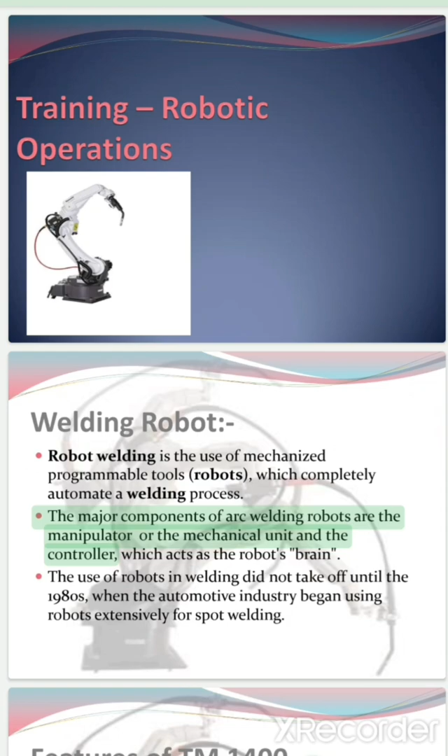Robot welding is the use of mechanized, programmable tools—robots—which completely automate a welding process. The major components of arc welding robots are the manipulator, or mechanical unit, and the controller, which acts as the robot's brain.

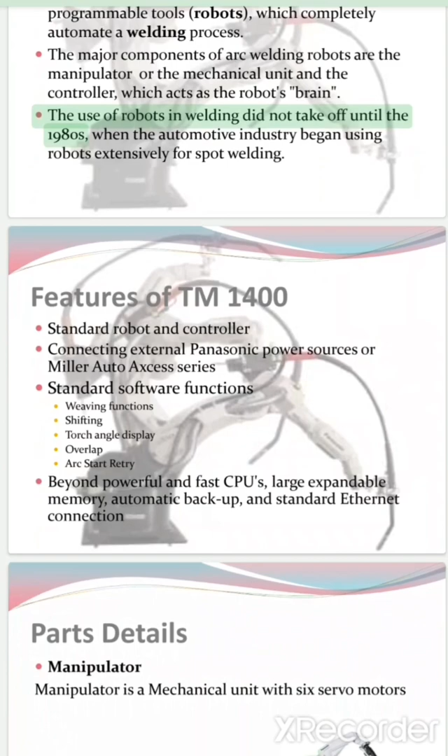The use of robots in welding did not take off until the 1980s, when the automotive industry began using robots extensively for spot welding.

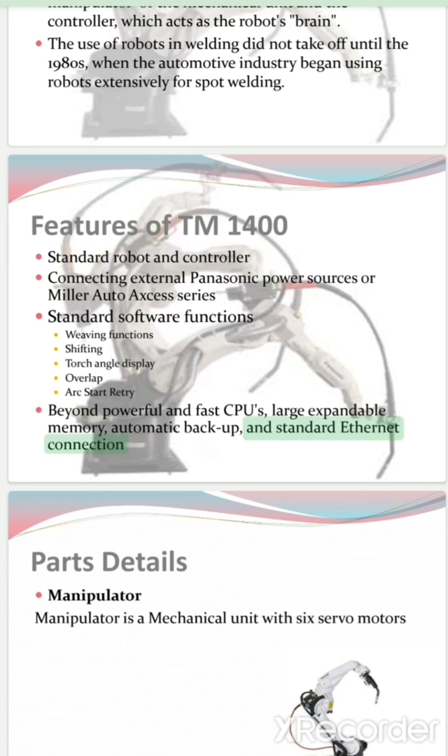Features of the TM1400 standard robot and controller: connecting external Panasonic power sources or Miller Auto Axcess series, standard software functions, weaving functions, shifting torch angle display, overlap arc start, powerful and fast CPUs, large expandable memory, automatic backup, and standard Ethernet connection.

Parts details. The manipulator is a mechanical unit with 6 servo motor robot axes. A manipulator has 6 axes, and we can add more additional axes at the fixture end—these are called external axes.

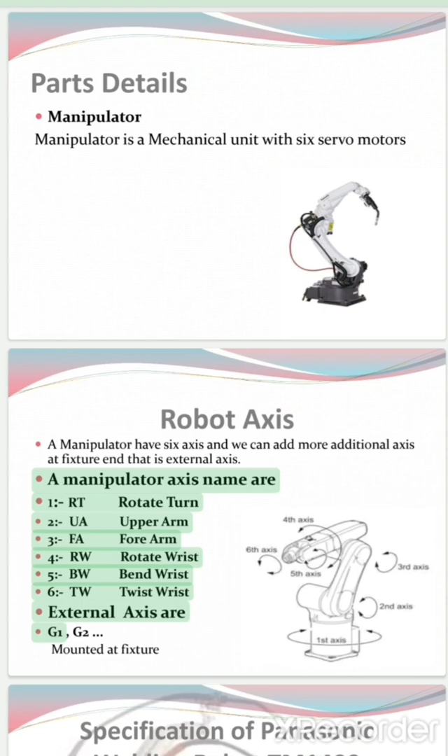Manipulator axis names: 1, RT rotate turn; 2, UA upper arm; 3, forearm; 4, RW rotate wrist; 5, BW bend wrist; 6, TW twist wrist. External axes are G1 and G2.

Mounted at fixture. Specification of Panasonic welding robot TM1400: payload 6 kg max.

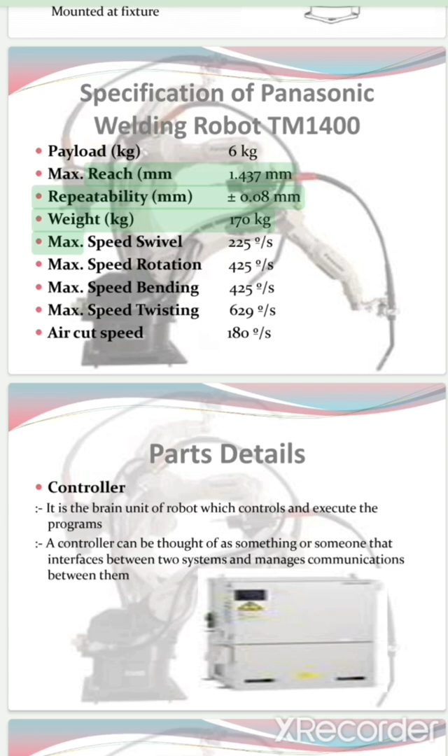Reach 1437 mm. Repeatability plus minus 0.08 mm. Weight 170 kg max. Speed swivel 225 degrees per second max. Speed rotation 425 degrees per second max. Speed bending 425 degrees per second max. Speed twisting 629 degrees per second. Air cut speed 180 degrees per second.

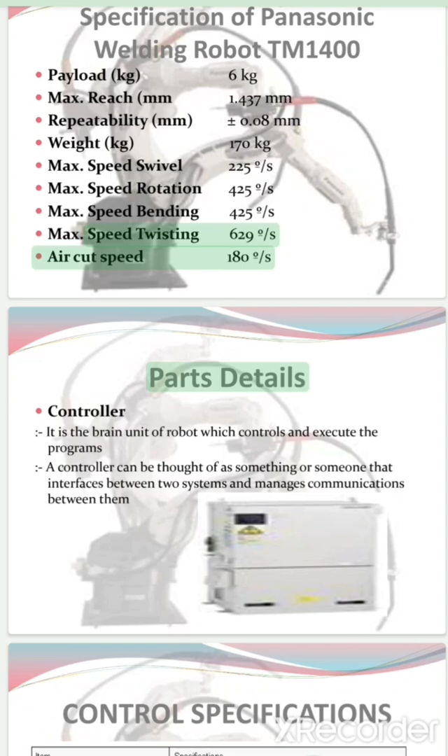Parts details. The controller is the brain unit of the robot, which controls and executes the programs. A controller can be thought of as something or someone that interfaces between two systems and manages communications between them.

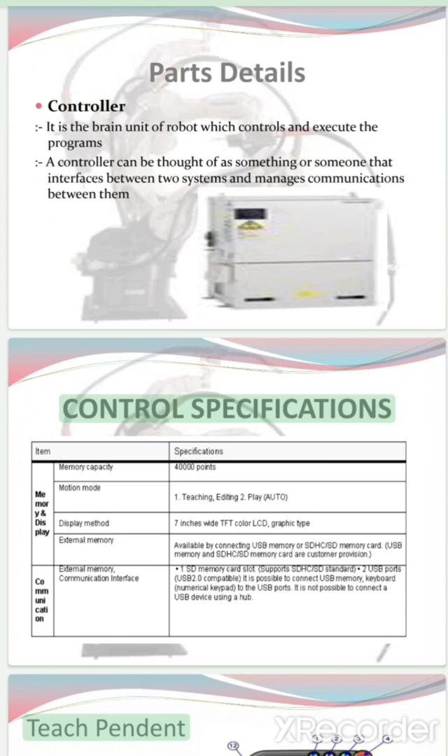Control specifications, teach pendant. 1. Start switch: this switch is used to start or restart robot operation in auto mode.

2. Hold switch: this switch is used to suspend robot operation while keeping the servo power on. 3. Servo on switch: this switch is used to energize the servo power.

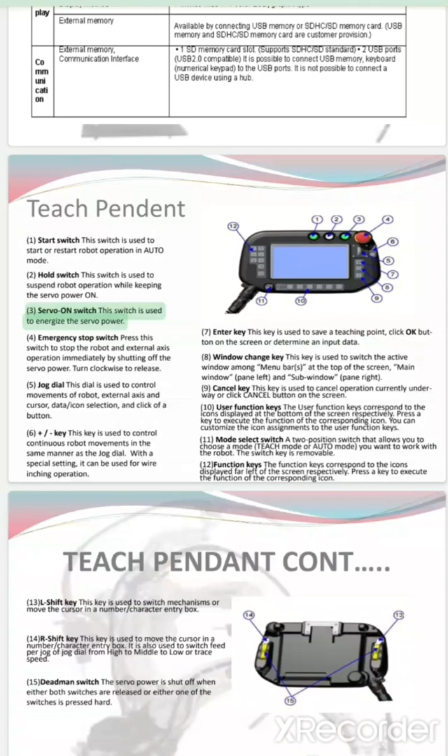4. Emergency stop switch: press this switch to stop the robot and external axis operation immediately by shutting off the servo power. Turn clockwise to release.

5. Jog dial: this dial is used to control movements of the robot, external axis and cursor, data/icon selection, and click of a button. 6. +/- key.

This key is used to control continuous robot movements in the same manner as the jog dial, with a special setting. It can be used for wire inching operation.

7. Enter key: this key is used to save a teaching point, click the OK button on the screen, or determine an input data.

8. Window change key: this key is used to switch the active window among the menu bar at the top of the screen, the main window pane on the left, and the sub window pane on the right.

9. Cancel key: this key is used to cancel the operation currently underway, or click the cancel button on the screen.

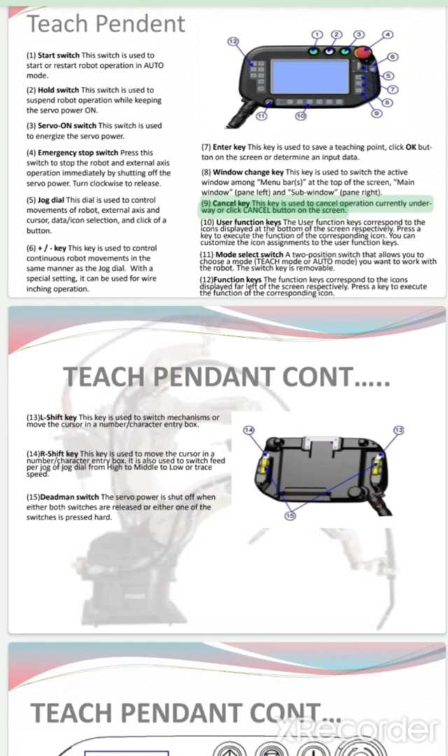10. User function keys: the user function keys correspond to the icons displayed at the bottom of the screen respectively. Press a key to execute the function of the corresponding icon. You can customize the icon assignments to the user function keys.

11. Mode select switch: a two-position switch that allows you to choose the mode you want to work with the robot—teach mode or auto mode. The switch key is removable.

12. Function keys: the function keys correspond to the icons displayed on the far left of the screen respectively. Press a key to execute the function of the corresponding icon.

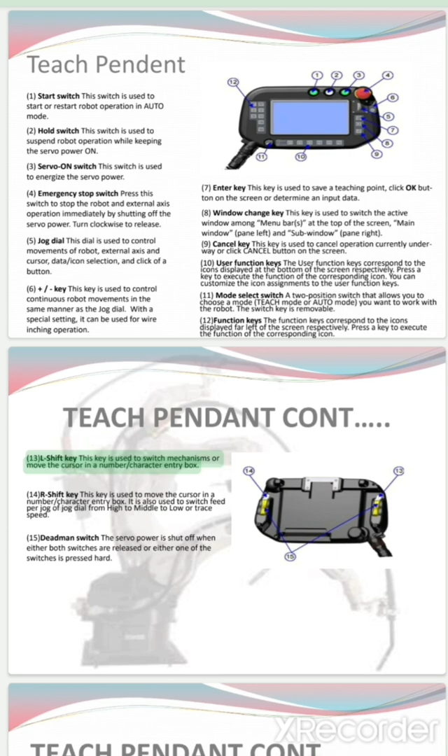Teach pendant, continued. 13. L shift key: this key is used to switch mechanisms or move the cursor in a number/character entry box.

14. R shift key: this key is used to move the cursor in a number/character entry box. It is also used to switch feed per jog of the jog dial from high to middle to low, or trace speed.

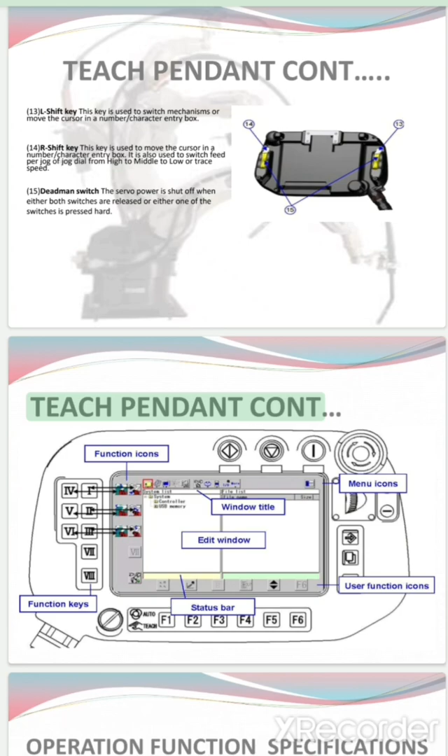15. Deadman switch: the servo power is shut off when either both switches are released or either one of the switches is pressed hard. Teach pendant, continued. Operation function specifications.

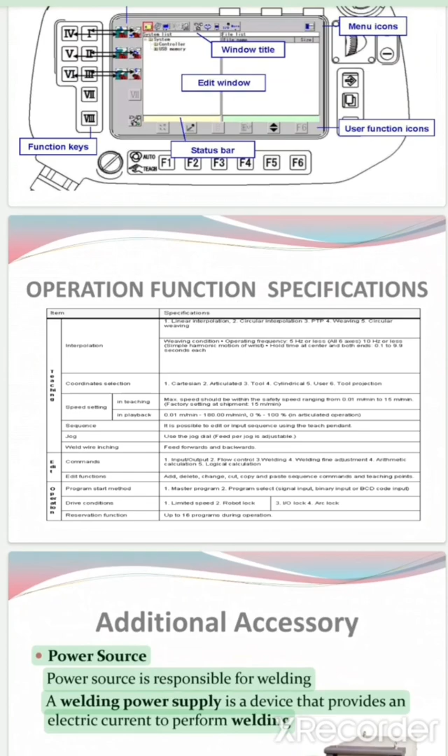Additional accessory: power source. The power source is responsible for welding. A welding power supply is a device that provides an electric current to perform welding.

Welding is a fabrication process to make a high-strength joint between two or more parts by heating to their melting temperature, with or without the application of pressure, and with or without the use of filler metal. The filler metal has a melting point approximately the same as the base metal.

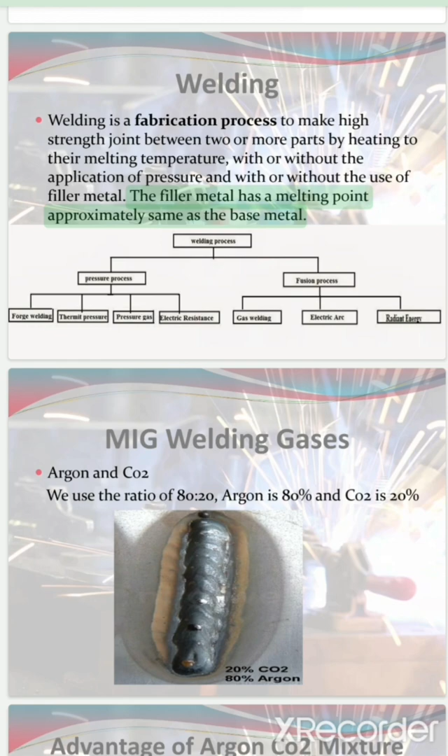MIG welding gases: argon and CO2, used in a ratio of 80-20—argon 80% and CO2 20%. Advantage of the argon-CO2 mixture over 100% CO2.

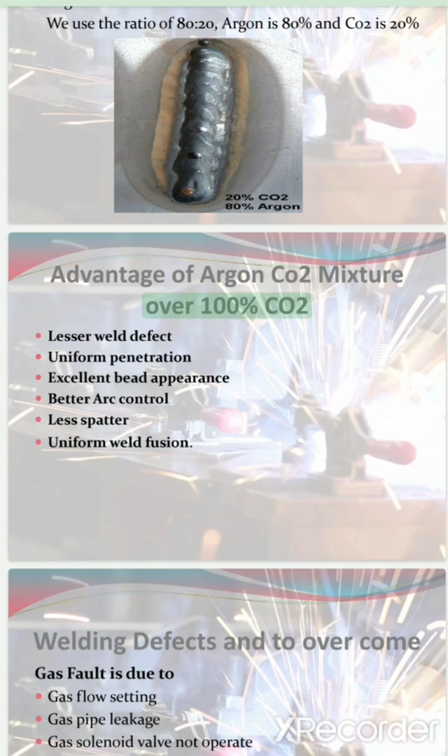Lesser weld defect, uniform penetration, excellent bead appearance, better arc control, less spatter, uniform weld fusion.

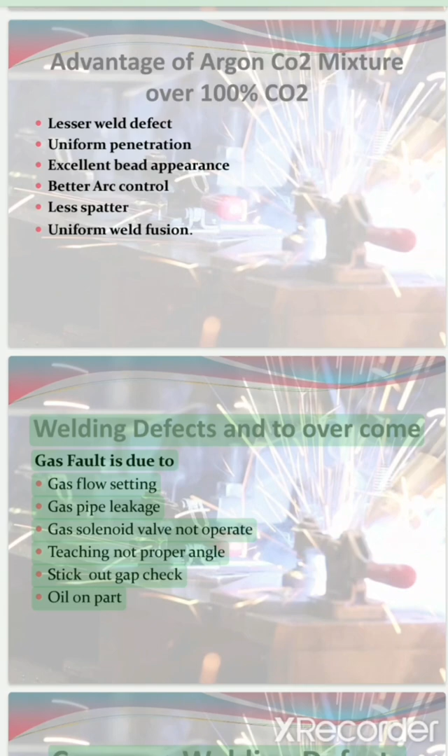Welding defects and how to overcome gas faults: due to gas flow setting, gas pipe leakage, gas solenoid valve not operating, teaching not at proper angle, stick-out gap, check oil on part.

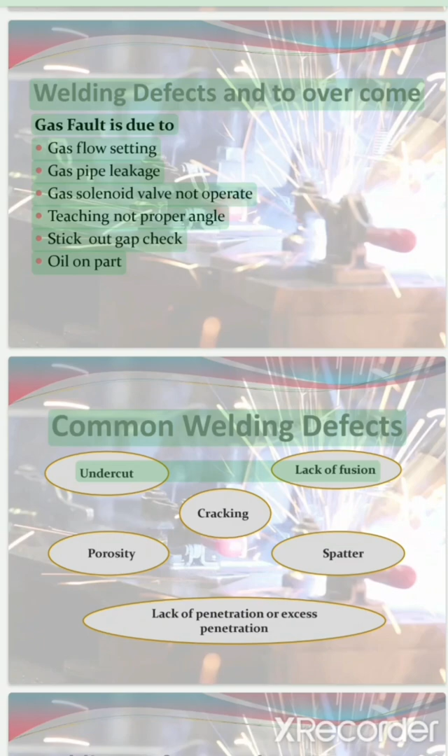Common welding defects: undercut, lack of fusion, porosity, spatter, lack of penetration or excess penetration, cracking.

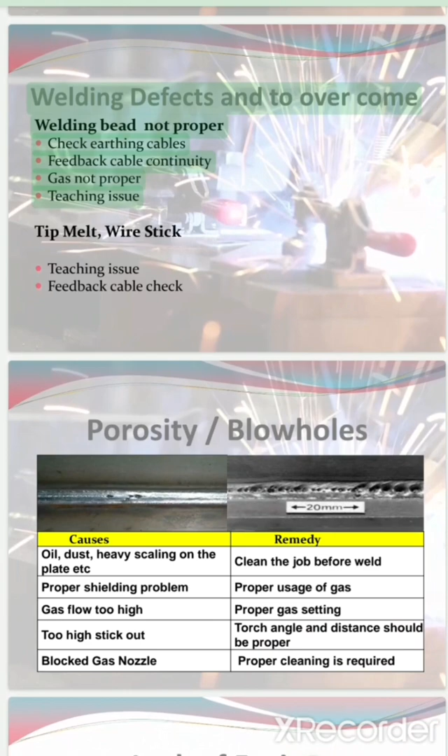Welding defects and how to overcome them: welding bead not proper, check earthing cables, feedback cable continuity, gas not proper, teaching issue, tip melt, wire stick, teaching issue, feedback cable check, porosity, blowholes.

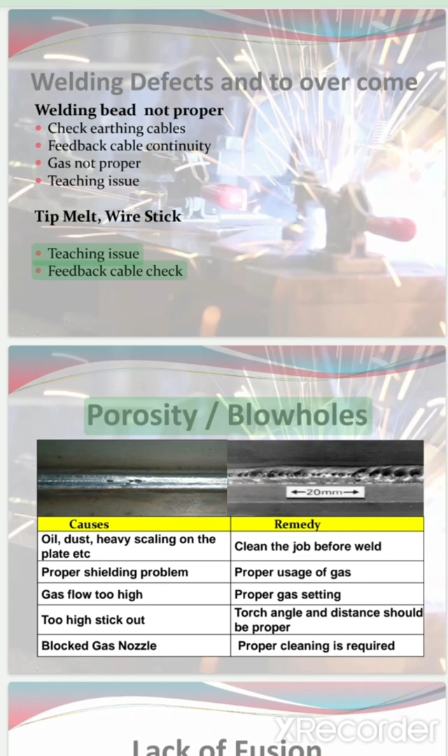Causes and remedy: oil, dust, heavy scaling on the plate etc. Clean the job properly before welding.

Shielding problem: proper usage of gas, gas flow too high, proper gas setting, stick-out torch angle and distance should be proper. Blocked gas nozzle requires proper cleaning. Lack of fusion.

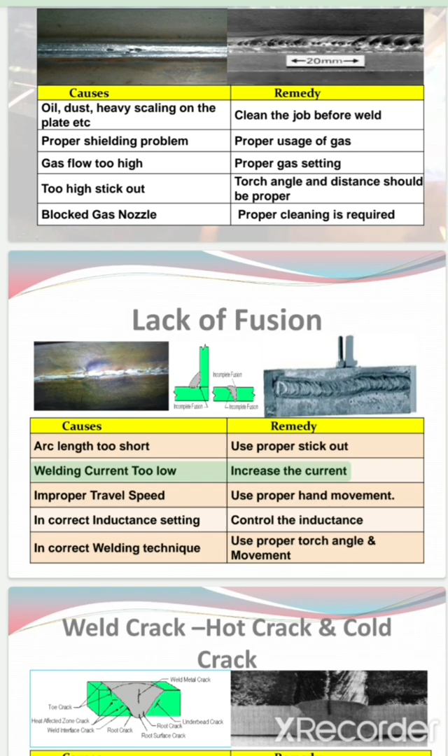Causes and remedy: arc length too short, use proper stick-out. Welding current too low, increase the current. Improper travel speed, use proper hand movement. Incorrect inductance setting, control the inductance. Incorrect welding technique, use proper torch angle and movement.

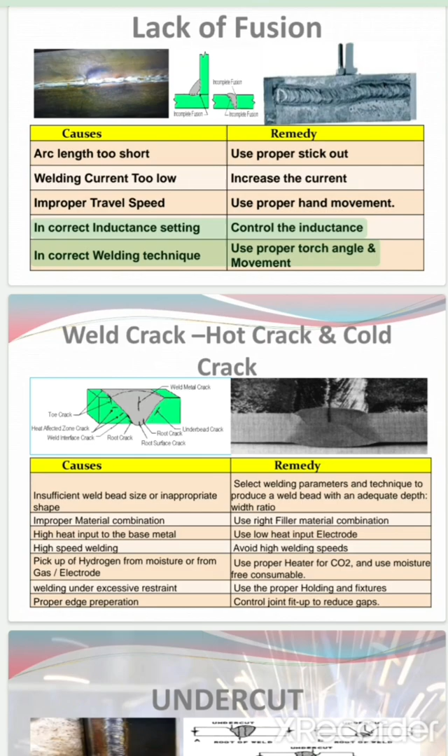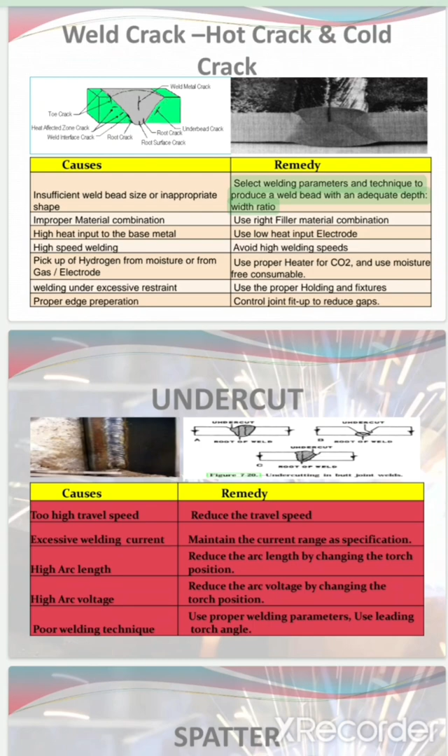Weld crack: hot crack and cold crack. Causes and remedy: insufficient weld bead size or inappropriate shape. Select welding parameters and technique to produce a weld bead with an adequate depth to width ratio.

Improper material combination: use the right filler material combination. High heat input to the base metal: use low heat input. Electrode high speed welding: avoid high welding speeds.

Pickup of hydrogen from moisture or from gas and electrode: use proper heater for CO2 and use moisture-free consumable. Welding under excessive restraint: use proper holding and fixtures. Proper edge preparation: control joint fit-up to reduce gaps.

Undercut. Causes and remedy: too high travel speed, reduce the travel speed. Excessive welding current, maintain the current range as per specification.

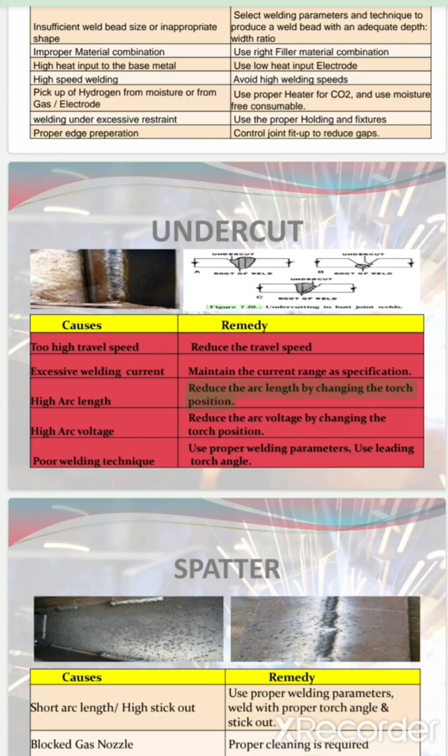High arc length: reduce the arc length by changing the torch position. High arc voltage: reduce the arc voltage by changing the torch position. Poor welding technique: use proper welding parameters and leading torch angle.

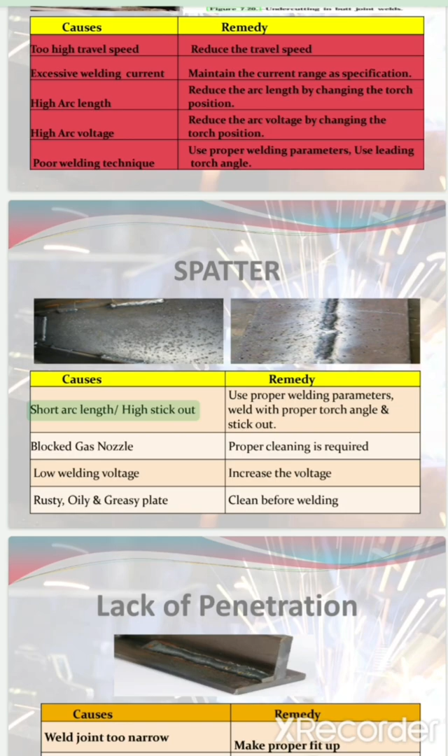Causes and remedy: short arc length or high stick-out - use proper welding parameters, weld with proper torch angle and stick-out. Blocked gas nozzle - proper cleaning required. Low welding voltage - increase the voltage. Rusty, oily and greasy plate - clean before welding.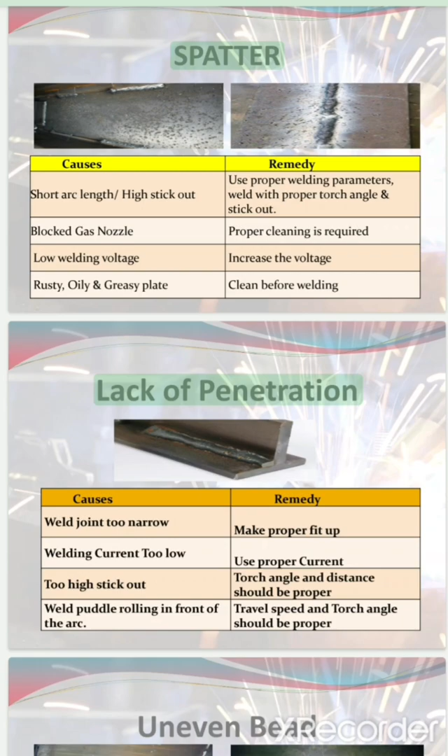Spatter and lack of penetration. Causes and remedy: weld joint too narrow - make proper fit-up. Welding current too low - use proper current, stick-out torch angle and distance should be proper.

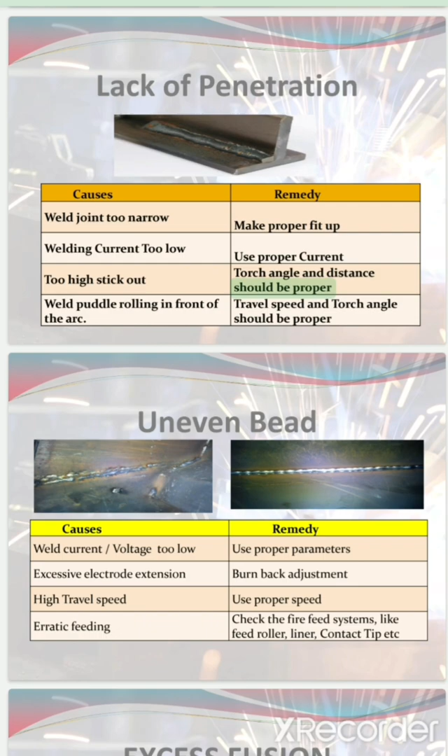Weld puddle rolling in front of the arc. Travel speed and torch angle should be proper.

Uneven bead. Causes and remedy: weld current or voltage too low - use proper parameters. Excessive electrode extension - burn back adjustment. High travel speed - use proper speed. Erratic feeding - check the wire feed systems like feed roller, liner, contact tip etc.

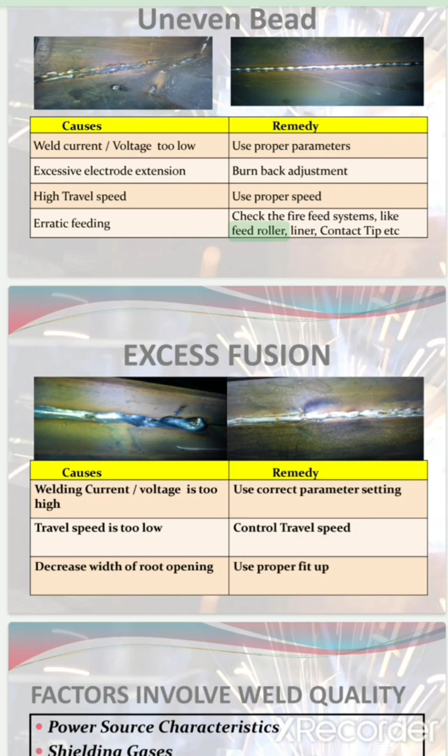Excess fusion. Causes and remedy: welding current or voltage too high - use correct parameter setting. Travel speed too low - control travel speed. Decrease width of root opening - use proper fit-up.

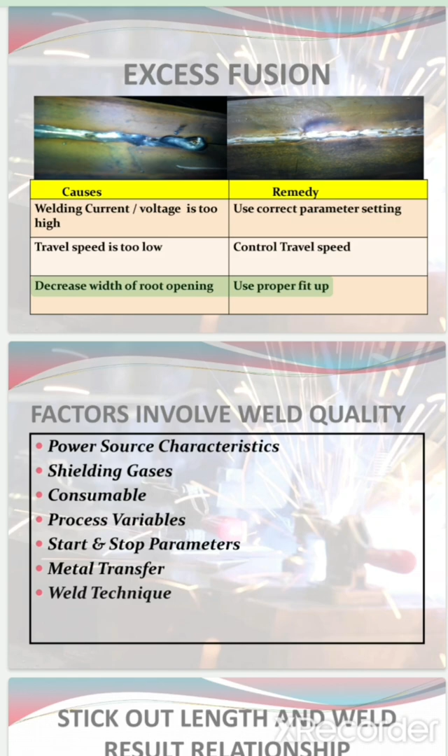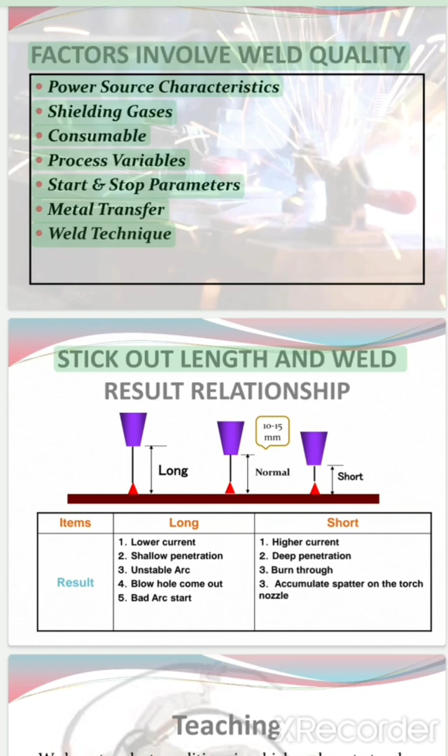Factors involved in weld quality: power source characteristics, shielding gases, consumable process variables, start and stop parameters, metal transfer, weld technique, stick-out length and weld result relationship.

Items - long and short, results: 1. Lower current, 2. Shallow penetration, 3. Unstable arc, 4. Blowholes come out, 5. Bad arc start. For higher current: 1. Deep penetration, 2. Burn through, 3. Accumulated spatter on the torch nozzle.

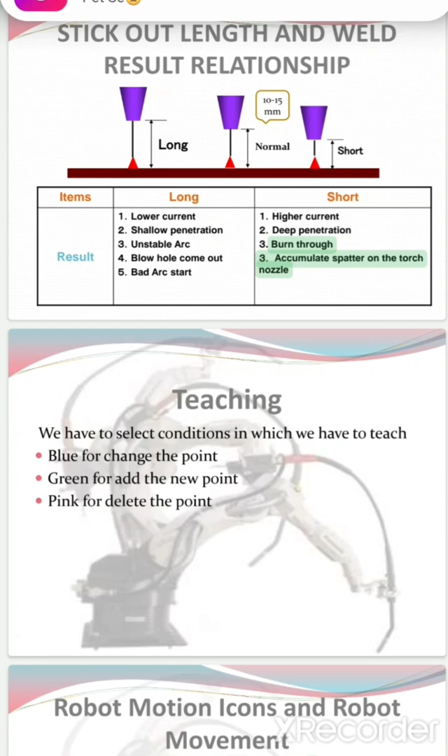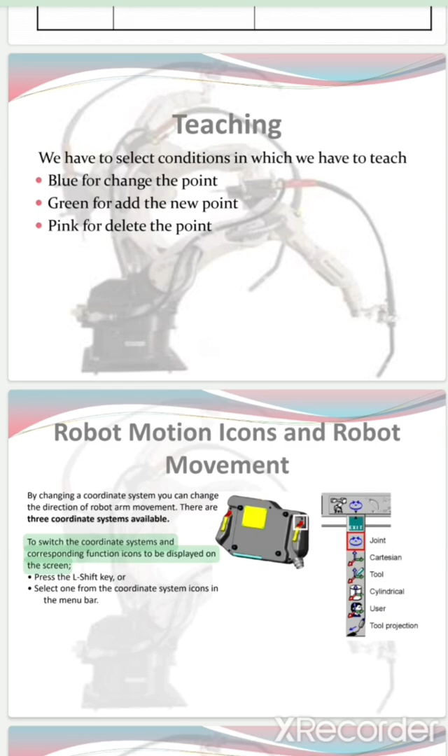Long, short, and robot movement. By changing a coordinate system, you can change the direction of robot arm movement. There are 3 coordinate systems available. To switch the coordinate systems and display corresponding function icons on the screen, press the L Shift key, or select one from the coordinate system icons in the menu bar.

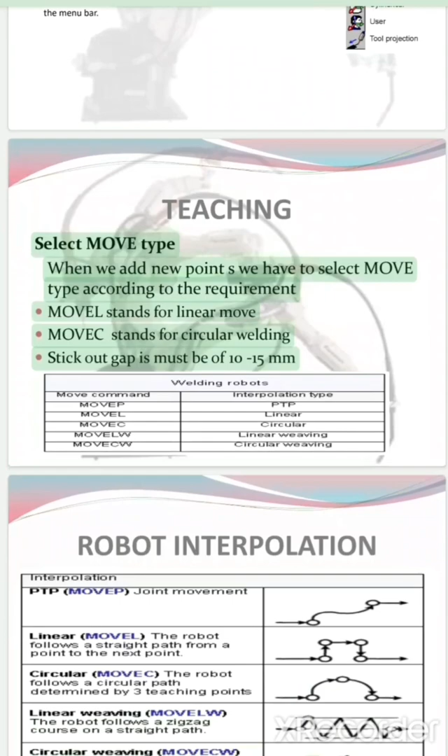Teaching: select move type. When adding a new point, you have to select the move type according to the requirement. Move L stands for linear, Move C stands for circular.

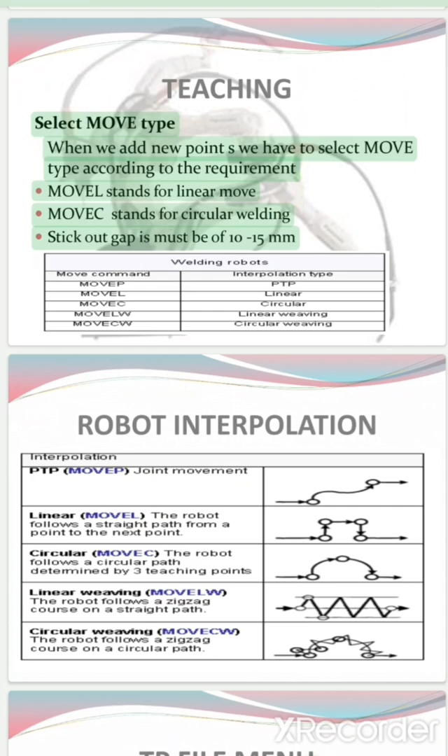Welding stick-out gap must be 10-15 millimeters. Robot interpolation, teaching file menu.

Step 1: Create a new file. Step 2: Create a new file count. Step 3: Register teaching points - travel method, interpolation, speed, etc.

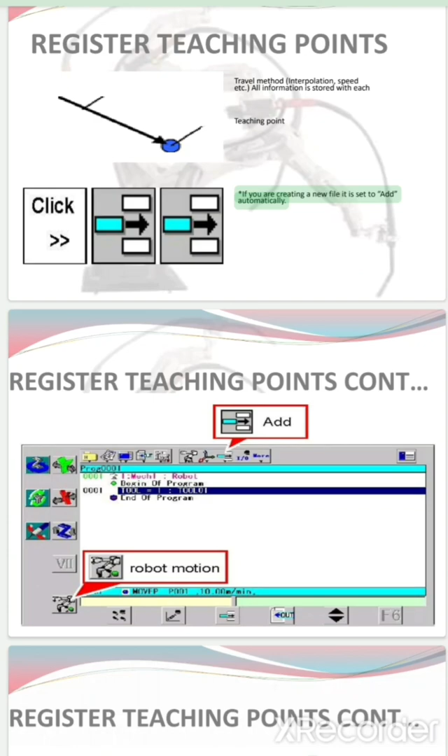All information is stored with each teaching point. If you are creating a new file, it is set to add automatically. Register the teaching points count.

Changing teaching points and changing teaching points count. Registration of teaching point, deletion.

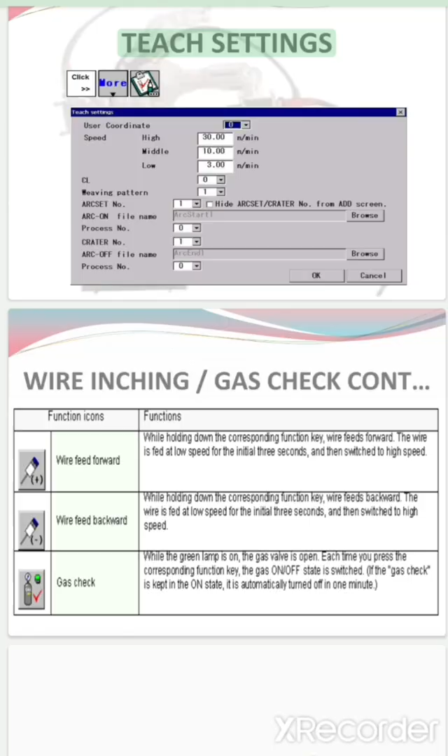Teach settings: wire inching and gas check count. Conditions for cycle start: check all clamps and their reed switch, check authorization lamp, check robot home input, check fixture home.